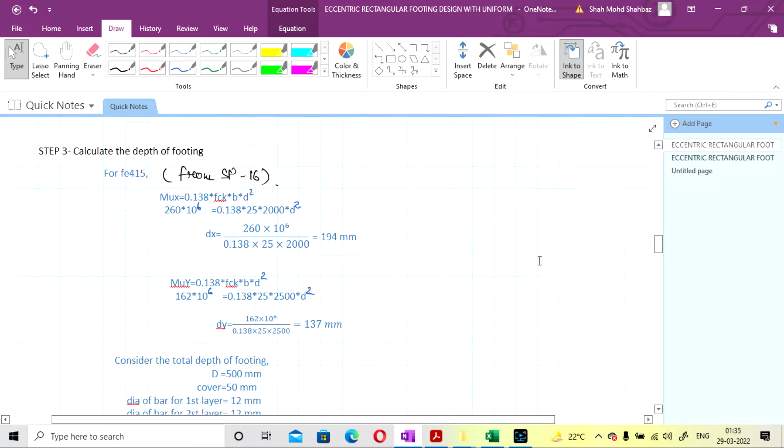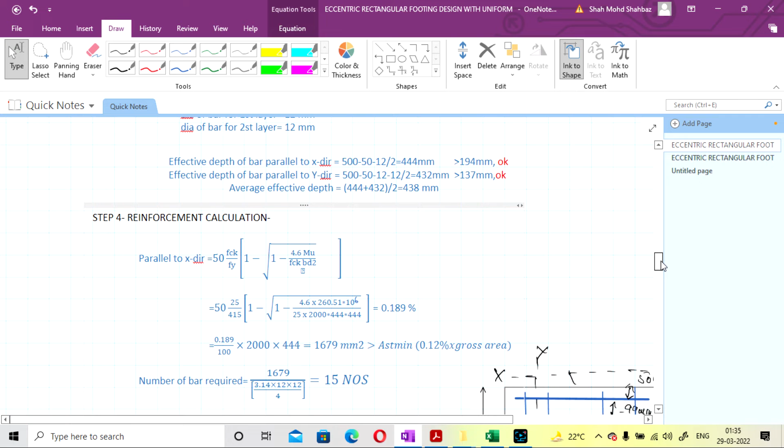This is the second lecture on eccentric footing design for rectangular columns, for uniaxial moment. We have already done the reinforcement design for x and y in both directions. Now we have to go for the check for one way and two way shear.

So here for x direction, how it is calculated. We are going to check for one way shear first. Our critical distance will be at a distance of small d from the face of the column. The small d will be your effective depth in x, and for y direction we will first calculate for x direction.

So we also have to find the net upward pressure at the critical face, that is at distance d from the face of the column.

Now by interpolation you can find this. How to use the interpolation we have already done in our first lecture, you can go and check from there. The same steps have to be followed for the interpolation here also.

So our net upward pressure will be calculated at the critical face. For x direction it is coming as 147.96. The same procedure will be followed as earlier, you can go and check from there.

Now this distance will be 1.909, and this will be 0.591. This will be your effective depth in x direction.

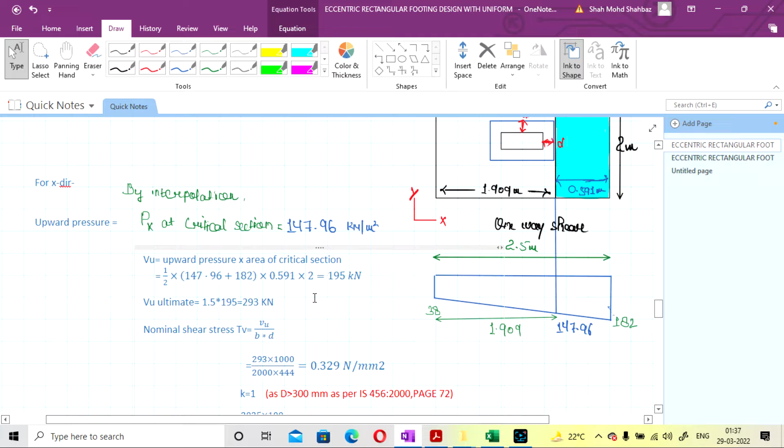So our nominal shear stress will be calculated as tau v equal to VU upon b into d. VU here is calculated as 293 multiplied by 1000 for conversion into Newton per mm square, divided by b, that is the width of the footing, here it is 2 meter, that is 2000 mm, multiplied by d, that is the effective depth in x direction, so it is 444. Our nominal shear stress will come as 0.329 Newton per mm square.

One more thing, we have to consider the K value also. Here it is 1, as our total depth is greater than 300 mm. We have considered our total depth as 500 mm, so we have to take the value of K as 1. This is mentioned in IS code 456 2000 on page number 72, you can go and check from there.

So our percentage of steel will be equal to the steel we have given in x direction, that is 2035 multiplied by 100, divided by 2000, that is the width of the footing, multiplied by effective depth of the footing. It will come as 0.229 percentage, and our tau c, the design shear strength, will come as 0.345.

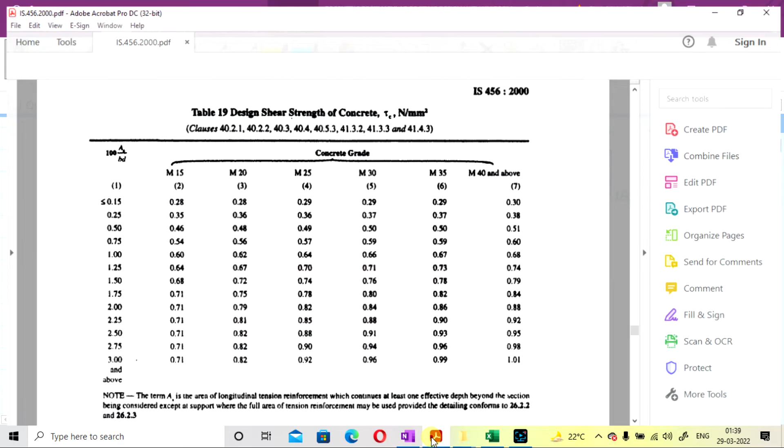How is it calculated? It is taken from IS code 456 table number 19. We have also done the interpolation here. This will be your percentage of steel, calculated as 100 into As upon B into D.

So our percentage of steel comes as 0.229, which falls between 0.15 and 0.25. So we have to write the values 0.15, 0.229, and 0.25, and the grade is M25.

So for the grade we have to write 0.29, find the x value, and 0.36. By using the same interpolation method, you have to find the value, and after interpolation our value comes as 0.345.

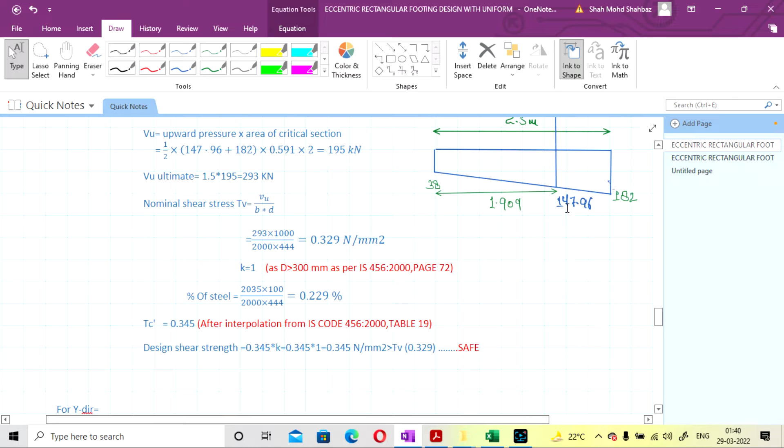So how we have done the interpolation for the upward pressure, we have to follow the same procedure for this also, using table number 19 from IS code 456.

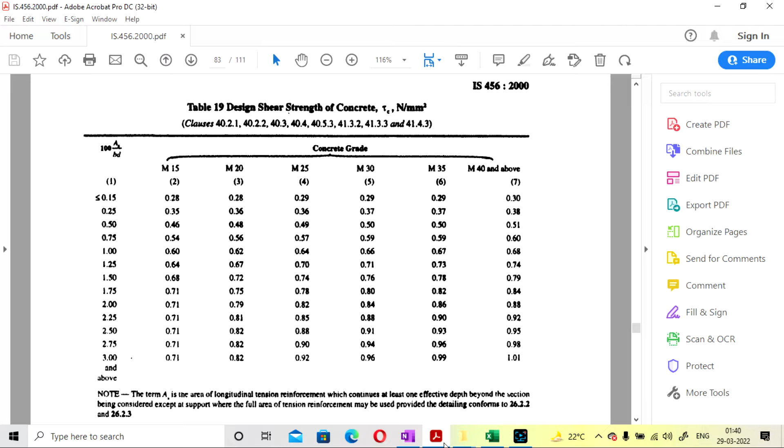If you don't know how to calculate this, I have already shown in my previous lecture for the slab design also, and for the square footing design you can go and check from there, or you can also use the Excel sheet for the design. It also mentions the interpolation table, you can directly fill the values and take the value from there.

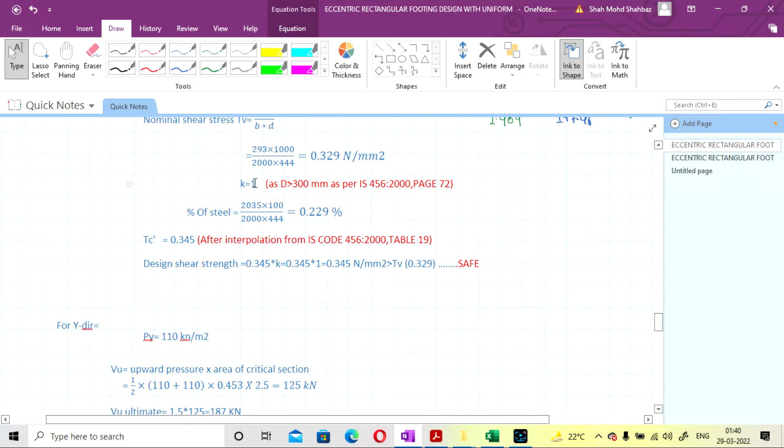Now our design shear strength will be equal to 0.345 multiplied by your K value, that is 1. So it will come as 0.345 Newton per mm square, and this value is greater than our nominal shear stress, that is 0.329. So here it is also safe in one way.

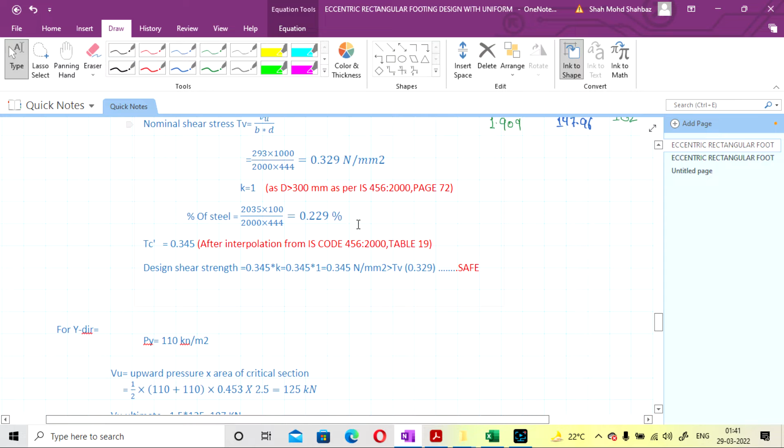So similarly for the y direction, if you want to find, you can also find. So our Py will be, that is net upward pressure in y direction, is equal to 110 kN per meter square, because no moment is applied and your upward pressure is same in all the positions.

So the formula will be similar: net upward pressure multiplied by area of the critical section. So our net upward pressure for both positions, x and y, will be equal to 110 only. So 110 plus 110 divided by 2 multiplied by 0.453. What is 0.453? This will be your critical distance in y direction, multiplied by 2.5.

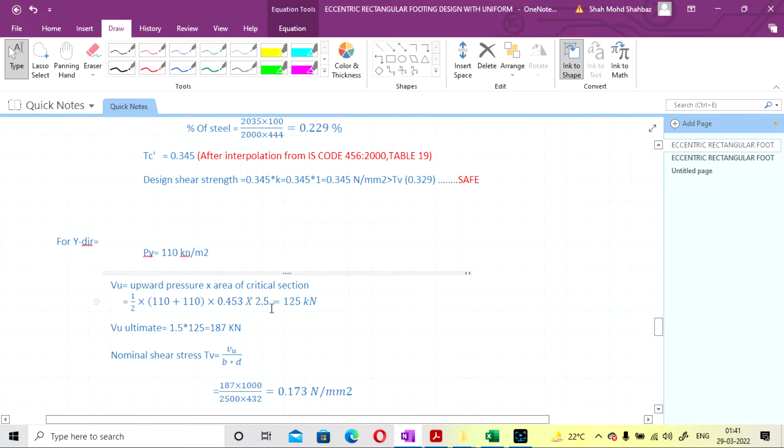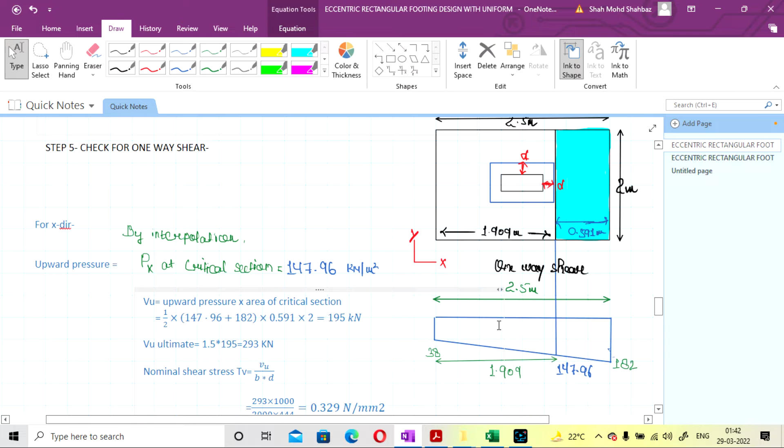So this is how we have calculated for x. Similarly you have to calculate for the y direction. So this will be your y direction here, and this distance will mark the area. So this distance will be your critical distance, and this will be equal to 0.453. This will be your critical distance, this whole portion.

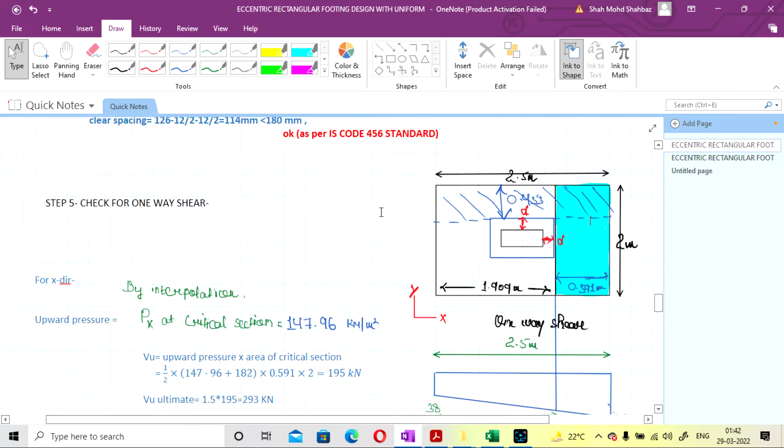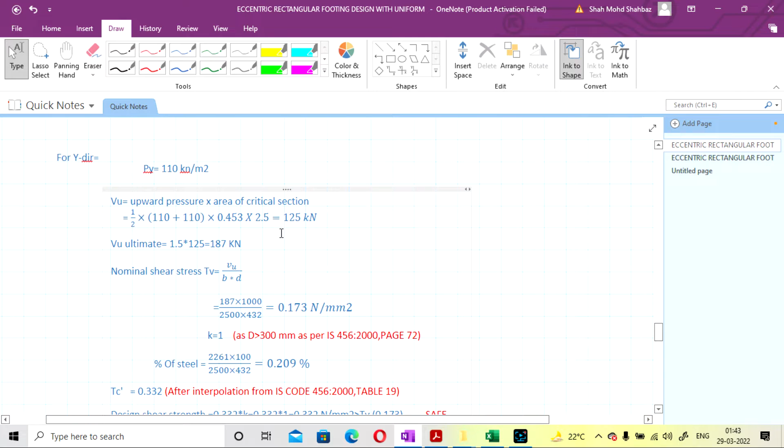For Y direction, so it is equal to 0.453 multiplied by 2.5. This will be your critical area. So here it is, and it will come as 125 kilonewton. Similarly VU ultimate will be 1.5 into 125, that will come as 187 kilonewton.

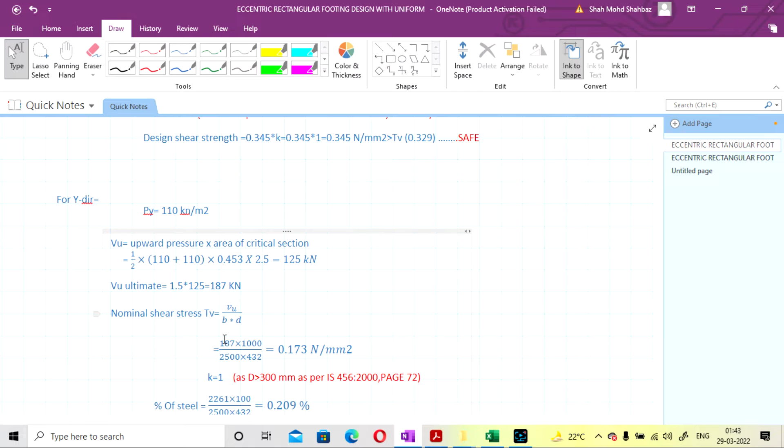So nominal shear for Y will be VU upon BD. VU will be equal to 187 into 1000 divided by 2500 into 432. So B will be 2500 here, that is the width of the footing in Y direction, multiplied with your effective depth in Y direction. So it will come as 0.173.

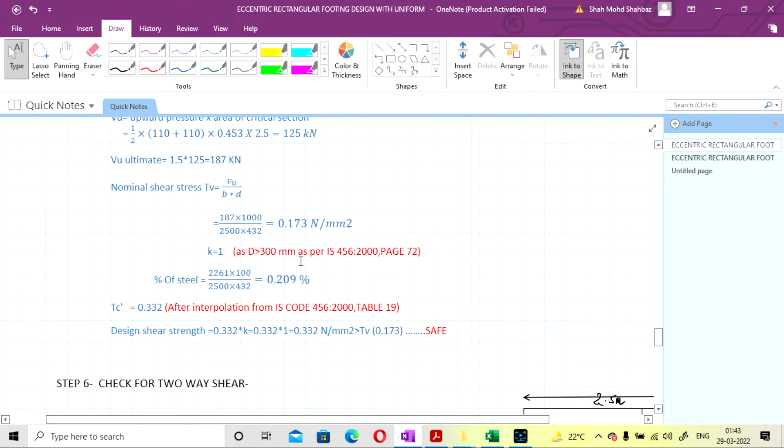K will be taken as 1, as our total depth of the footing is same, that is greater than 300 mm. Percentage steel will become as, what percentage steel we are given in Y direction, that is 2261, multiply by 100 divided by 2500, that is width and the effective depth, so it will come as 0.209.

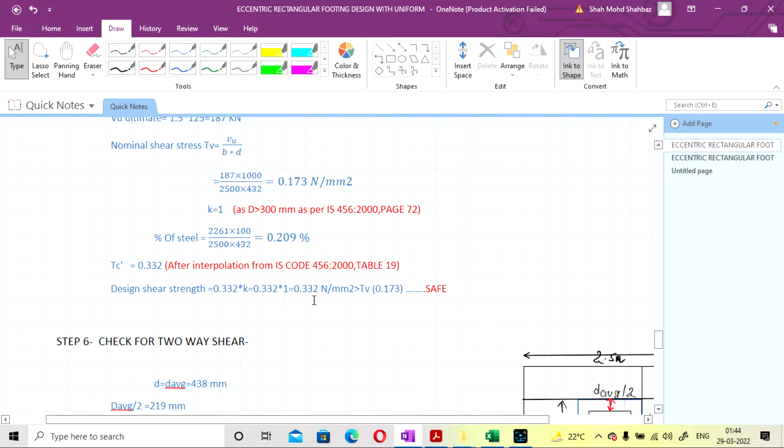And tau c will come by the same interpolation method from table 19, so it will come as 0.332, and our design shear strength will be multiplied by our K value, so it will become as 0.332 Newton per mm square, which is much more greater than our nominal shear strength. So this will be also safe in y direction.

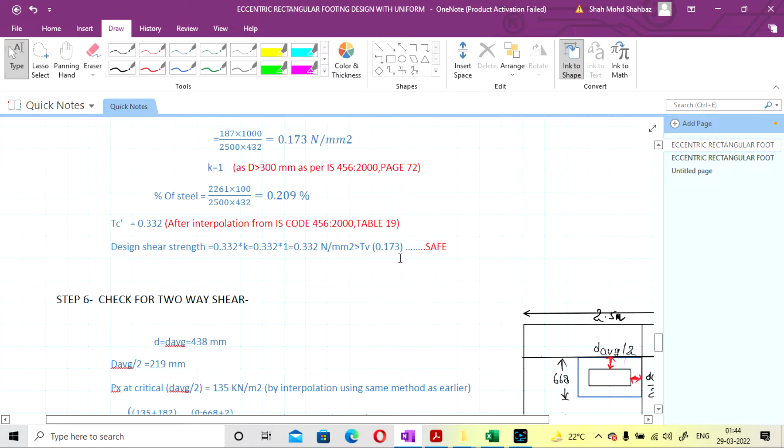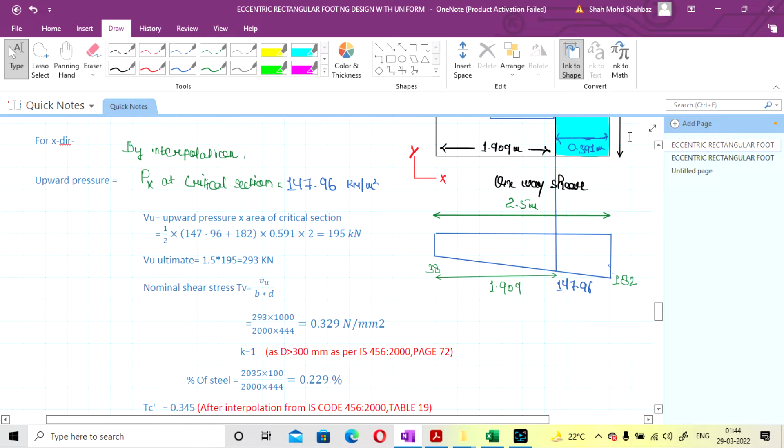So you don't need to find for the y direction if you find for x direction, where the varying moment is applied, as this is more in the longer side, that is x direction. So once you find for the x direction, you don't need to find for the y direction, but how it is calculated I have shown here, you can get it.

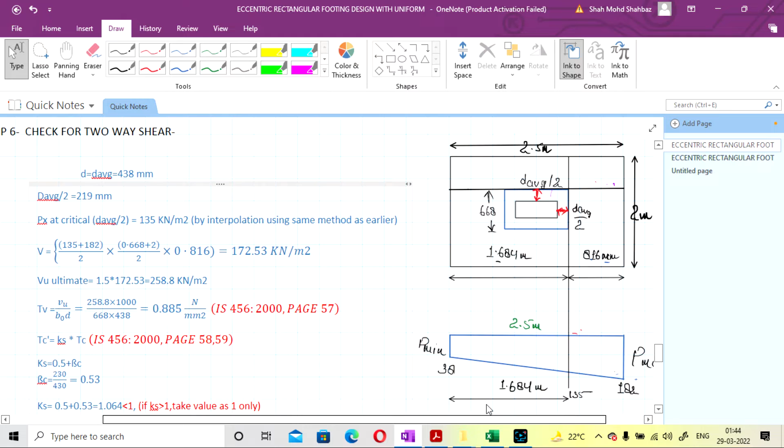Check for two-way shear, that is punching shear, so it will also be called a punching shear check. Why is it called punching shear? Because this check will be applied so that your column will not be punched into the footing and fail. So here what you have to do, you have to consider the average depth in place of effective depth.

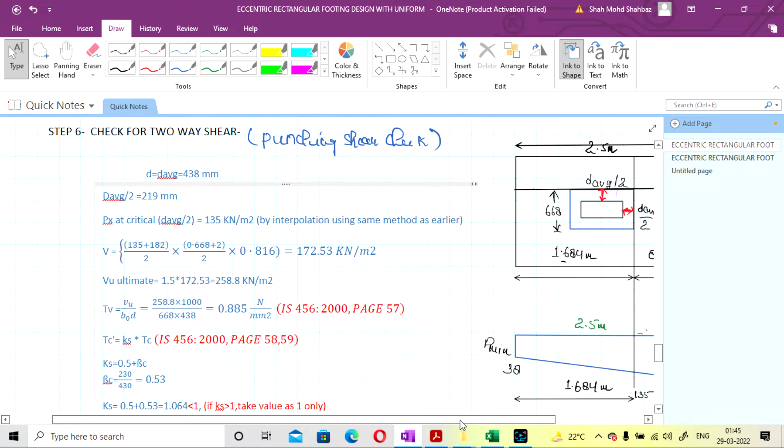Because it will be away at a distance of d by 2 from the face of your column, and here your distance will be different, and here it is taken from all the footing edge surface, so it will be taken from here in this direction, this type.

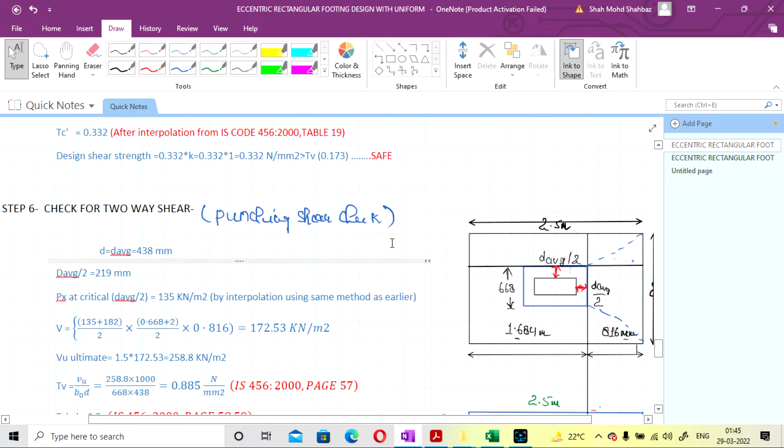So d average will be equal to 438 mm, which we have already done in our first lecture. Sorry, this d is equal to 438, and d average by 2 will be 219 mm, that is this. So our critical section is at a distance of d average by 2 from the face of the column.

So we are considering this area because here our moment will be maximum. That's why we are not considering here, because our ultimate net upward pressure is less than here, so we are considering this value from this side, because here it is more than this side. As we have shown in the diagram, net upward pressure will be more here, so we are going to consider this area only.

So px, that is net upward pressure at critical section in x direction, will be equal to 135 kilonewton per meter square. By using the same method of interpolation, we have to give the value, so it will come at a distance of 1.684 from this corner face of the footing.

So how is it calculated? You have to first find the total distance, and after that you have to minus this value, that is 430 minus d by 2 minus d by 2. Or you can add 430 plus d by 2 plus d by 2 and subtract it from your distance from here. So it will come as 1.684.

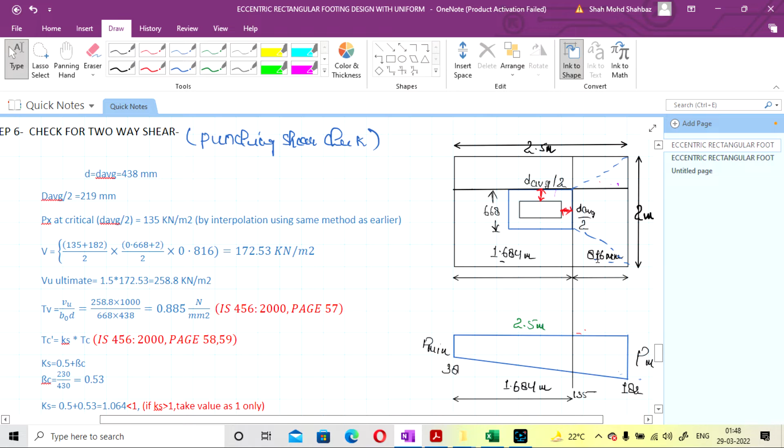This column face total distance 0.668 plus total width of the footing, that is 2 meter, divided by 2. So this average area will come, multiplied by 0.816. So it will come as 172.53 kilonewton per meter square, and VU ultimate will be multiplied by 1.5, so it is 258.8 kilonewton per meter square.

Now tau v, this formula will be a little bit different from one way shear, so it is equal to VU upon B naught into d, and here your B naught will be this 668. You don't have to take the footing area because we are going to check for punching, so here we have to take the value from the column area only.

So it is 668, that is the total shorter side of the column, plus effective depth d average by 2 plus d average by 2. That will come as 668 multiplied by 438, that is d average, the average depth of the footing. So it will come as 0.885 Newton per mm square, and it is mentioned on page number 57 of IS code 456 2000.

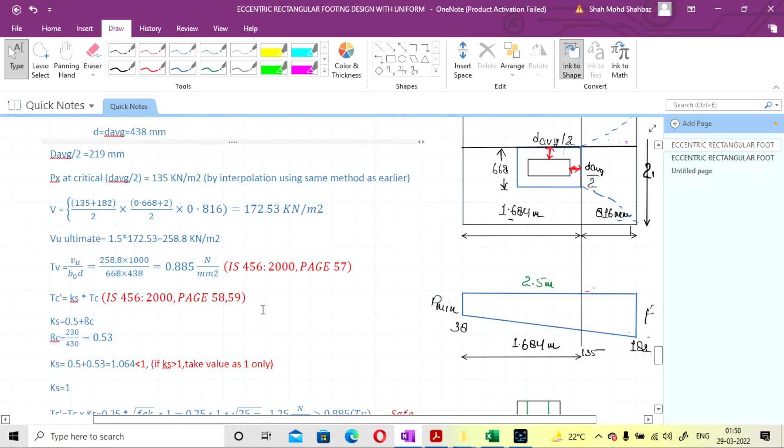Now tau c dash will be equal to Ks into tau c, so this will be the design shear strength. Ks into tau c is mentioned in IS code 456 page 58 and 59.

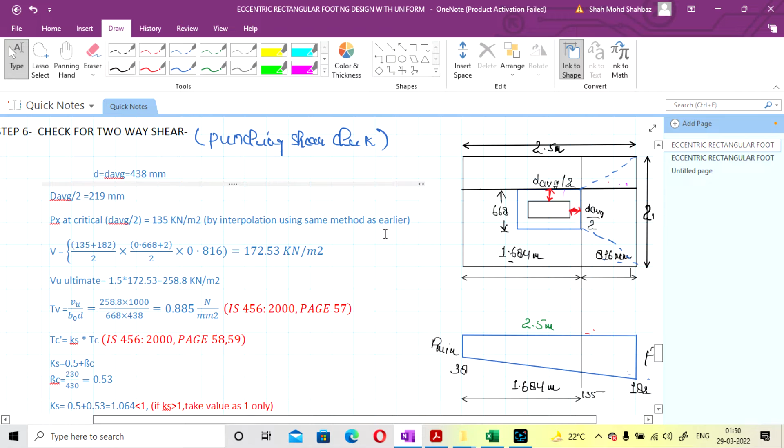Ks value will be equal to 0.5 plus beta c, and beta c is equal to the ratio of shorter side to longer side of the column, that is 230 by 430, and it will come as 0.53.

So Ks will be equal to 0.5 plus 0.53, and it will come as 1.064 -- but you don't have to consider the value more than 1. So if the value comes more than 1, you have to take the value of Ks as 1 only. If the value of Ks comes less than 1, you take that value, but if it comes more than 1, you take the value as 1 only. So Ks we are considering here as 1 only.

Now our tau c dash will be equal to tau c into Ks. Tau c is equal to 0.25 multiplied by square root of fck into Ks, that is 1. So 0.25 multiplied by fck is 25, square root of 25, so it will come as 1.25 Newton per mm square, which is greater than our tau v of 0.885 nominal shear, so this will also be safe in punching shear.

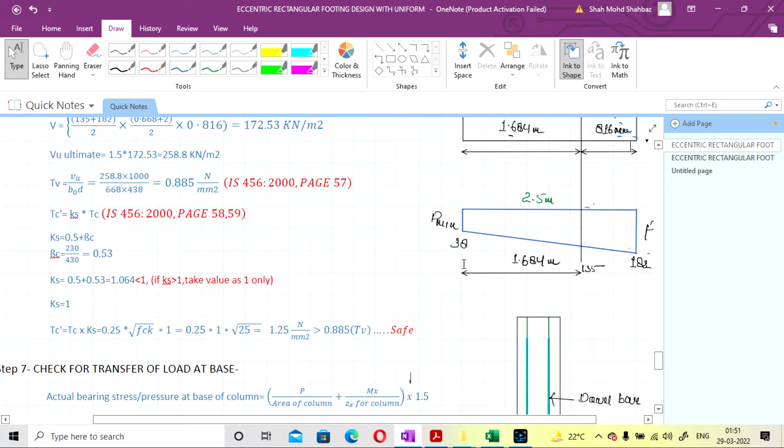So here it is maximum at the critical section, so you don't have to find for y direction. This will be a longer side, and here your maximum p ultimate pressure is coming, so this will be safe for two-way shear only.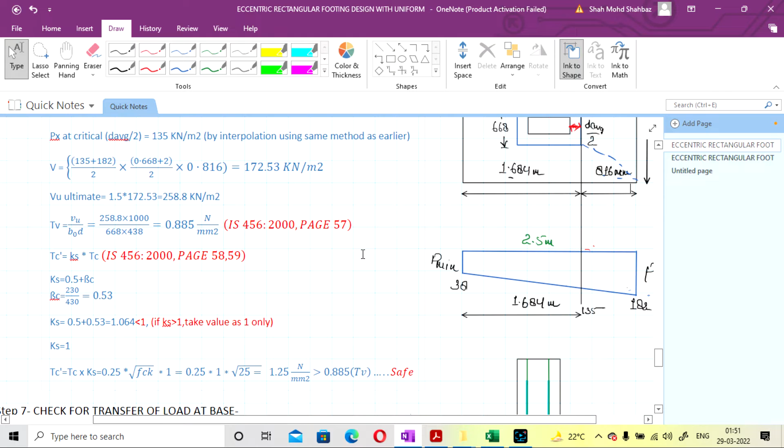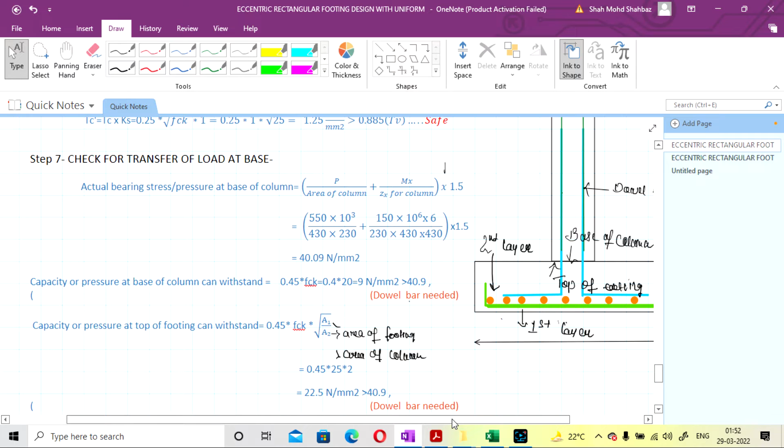Now we have to check for the transfer of load at the base of the footing. This will be the formula for uniaxial moment, for the calculation of force at the base for uniaxial moment footing: actual bearing pressure at the base of the column will be equal to P, that is the service axial load on the footing, divided by area of the column, that is 550 into 10 to the power 3 divided by 430 by 230, plus moment in x direction.

So either in uniaxial moment, either your mx value will be provided or your my will be provided, you have to mention that. Here our mx moment is given, so we have taken for mx only. If it is given for my also, you have to consider this value for my divided by zy for column, that is section modulus for column. In the Excel sheet I have given for both mx and my, so you have to directly fill the value only if moment is given for x direction, that is major moment, or if moment is given for y direction, that is minor moment, so you can directly calculate without any problem.

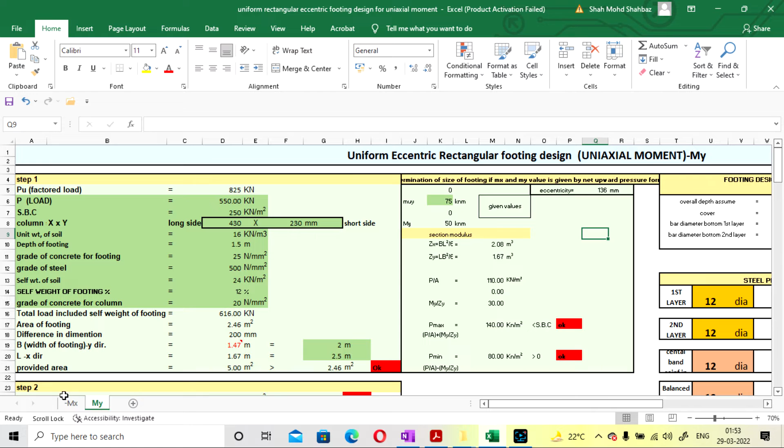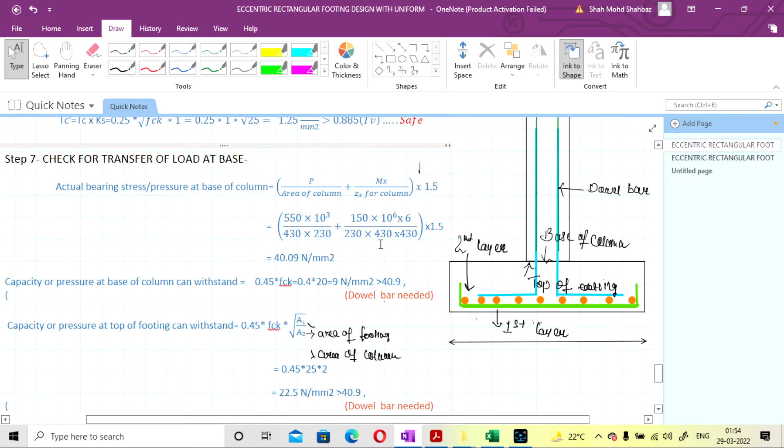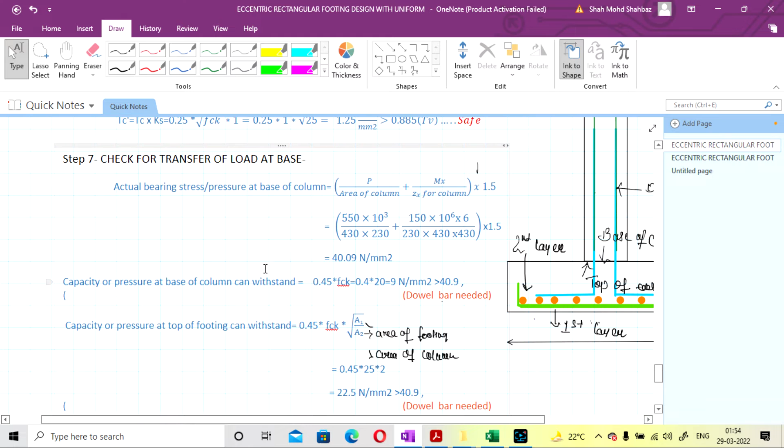So now it is equal to plus mx by zx for column multiplied by 1.5. It will come as 550 into 10 to the 3 divided by 430 by 230 plus mx, that moment in x direction is 150 into 10 to the power 6 divided by zx, so it is b d square by 6. What is b? You have to take the value from column only, it is 230 multiplied by d, that is the depth of the column. So d square it is 430 into 430 into 1.5. Why have we taken 1.5? Because we are taking the ultimate values. So our value will come as 40.09 Newton per mm square. This will be the actual pressure coming at the base of the column.

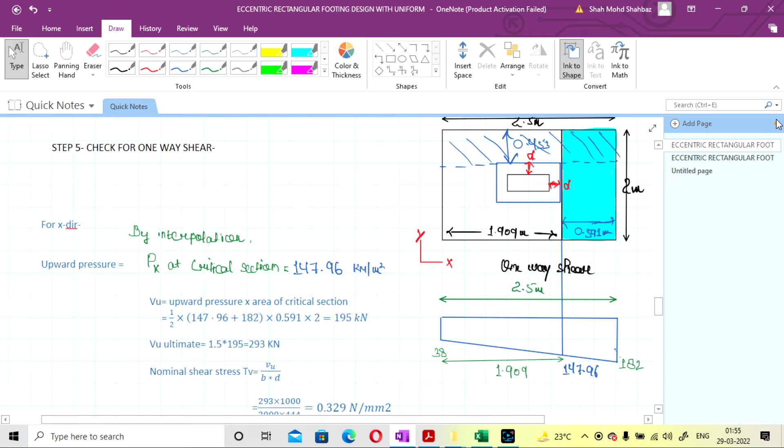Now we have to check either our column base or footing top will be able to take the pressure or not. So capacity or pressure at the base of the column which it can withstand will be equal to 0.45 multiply fck. Here you have to consider the grade that we have given for the column only, that's why we have taken the grade of concrete for the column at the starting, that is M20. So here you have to take that value only. So it is 0.45 into fck, that is 0.45 into 20, it is coming as 9 Newton per mm square, which is less than our calculated actual pressure. So here you have to provide a dowel bar at this position, because our column is going to take the load up to 9 Newton per mm only.

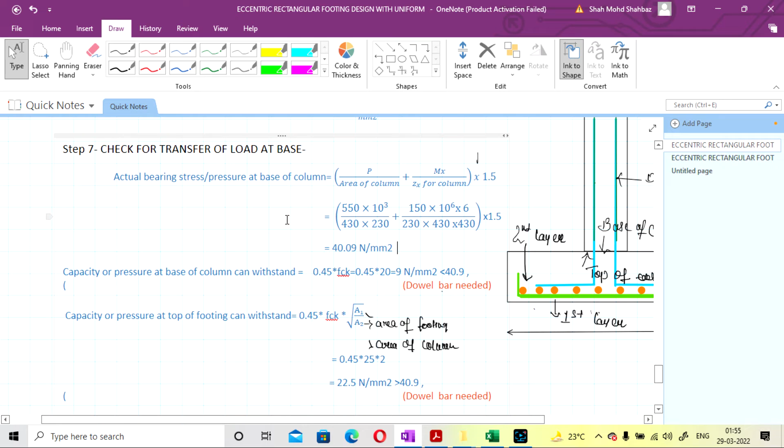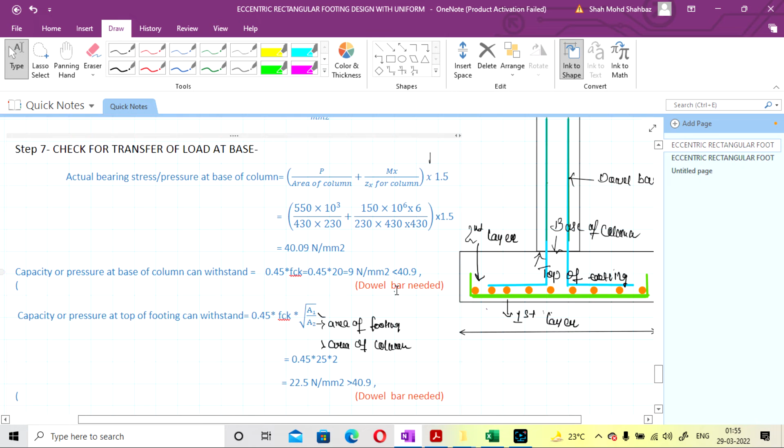And here our actual load is coming as 40.09 at the base of the column. This will be our base of the column, so you have to provide a dowel bar here. Similarly, you can check for the footing top also. The position for both the base of the column and top will be same, but we have to check for both the values.

So capacity of pressure at the top of the footing which can withstand the pressure will be equal to, this is the formula, 0.45 into fck into A1 by A2, and A1 by A2 will be your area of the footing upon area of the column, or area of the cross section, whichever is greater you have to take that value, and it is generally taken as 2 only. In most of the cases this value A1 by A2 is 2, but if you don't know how to find this A1 by A2, you can just check my previous lecture for square footing, you can get the answer. So it is equal to 0.45 into fck multiplied by square root of A1 by A2, and it is 0.45 multiplied by 25, this will be the grade of your footing, multiply by 2, that is square root of A1 by A2 value will be 2.

So our footing load that it can bear will come as 22.5 Newton, but it is also less than our actual pressure, that is 40.9. So you have to provide a dowel bar according to this also, so you have to give the dowel bar here.

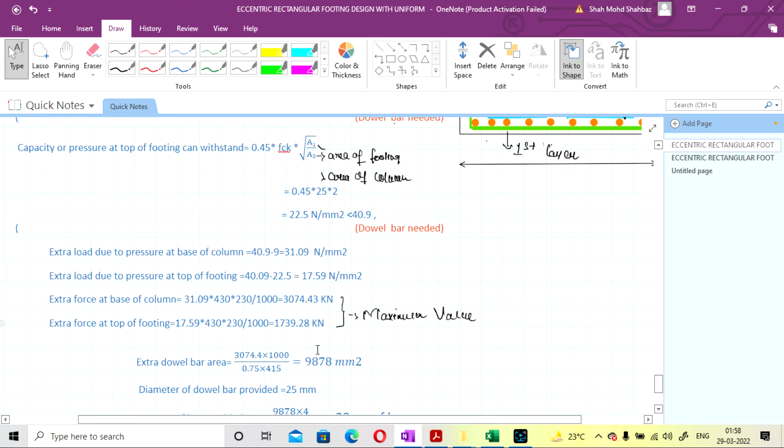So to take the maximum of this value, the extra dowel bar area will be equal to the 3074 force multiplied with 1000 divided by 0.75 into Fy. So this will be the formula for the calculation of dowel bar, and it is given in IS code 456 only. You can check from there also.

So now we have calculated the extra dowel bar area is equal to 9878, that is 3074 multiplied by 1000 divided by 0.75 Fy. The diameter of bar will be equal to, we are considering for the dowel bar, 25 mm. The number of bars will be calculated as 9878 divided by pi d square by 4, that is 3.14 into 25 into 25 by 4. So it will come as 20 number of bars.

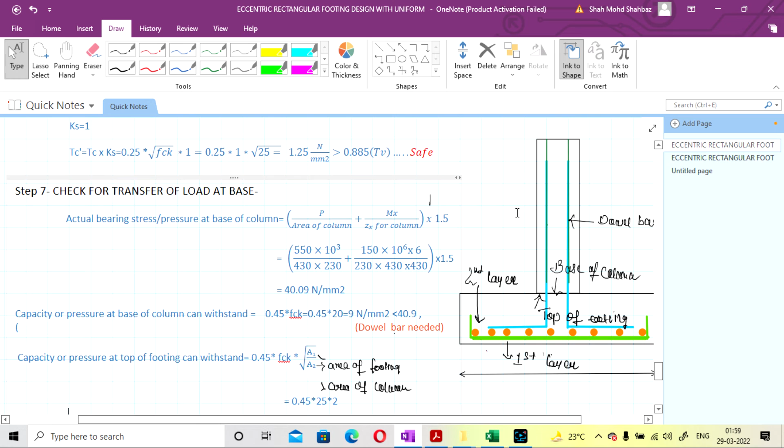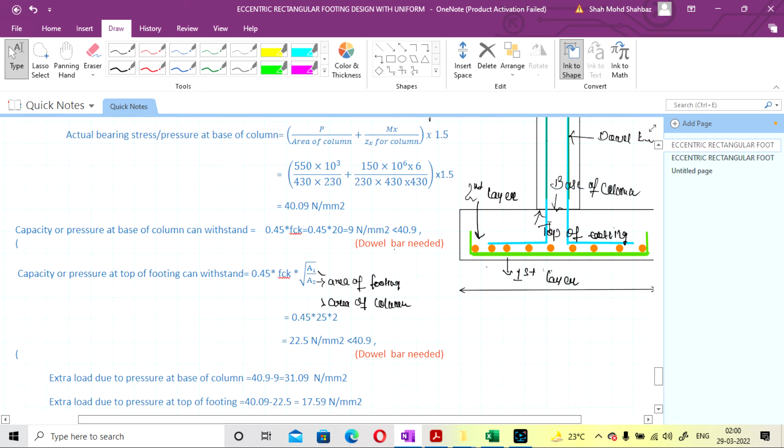Now we have to also find the final weight of the footing that we have got. So it will be the area of the footing multiplied by, sorry, this will not be a load, this is the total depth of the footing.

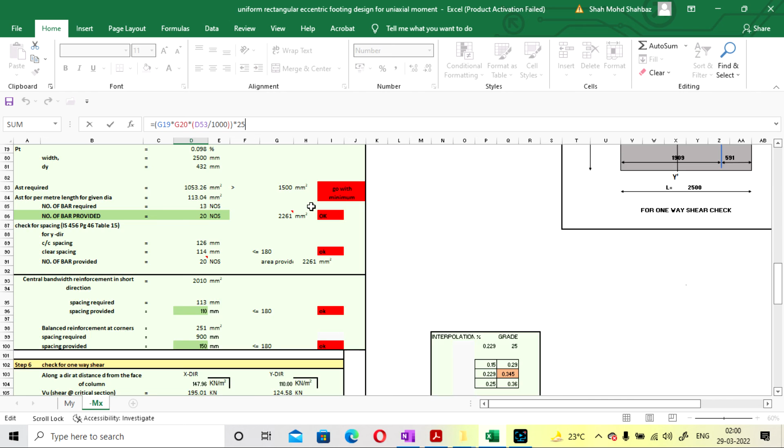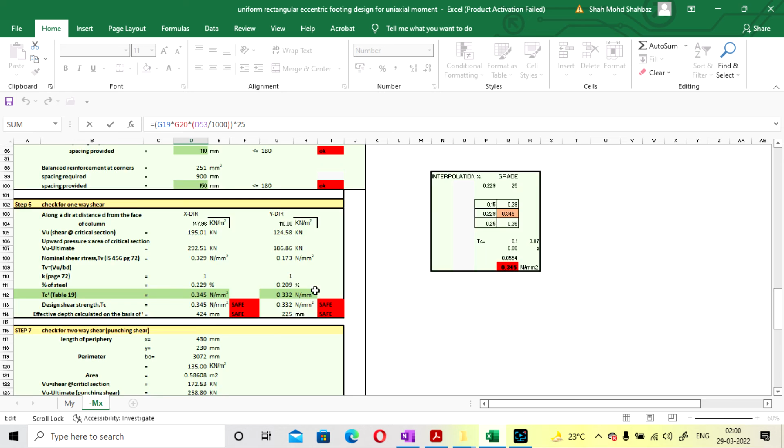One minute, let me just check whether I have done anything wrong here. Okay, it was right here, no problem. And here it is safe.

So this will be the area of the footing total into density of the concrete that we have taken. So it is 2 into 2.5 area multiplied by the total depth of the footing multiplied by density of concrete. So it will be equal to 62.5 kilonewton.

So this will be the final weight of the footing, and at the starting we had considered 12% of the load coming from the column. So our 12% will be 12 by 100 into 550, which is equal to 66 kilonewton. We have considered the larger value than the final weight we got here, so this will be safe. If this value is less, you have to again increase the initial percentage of footing self weight.

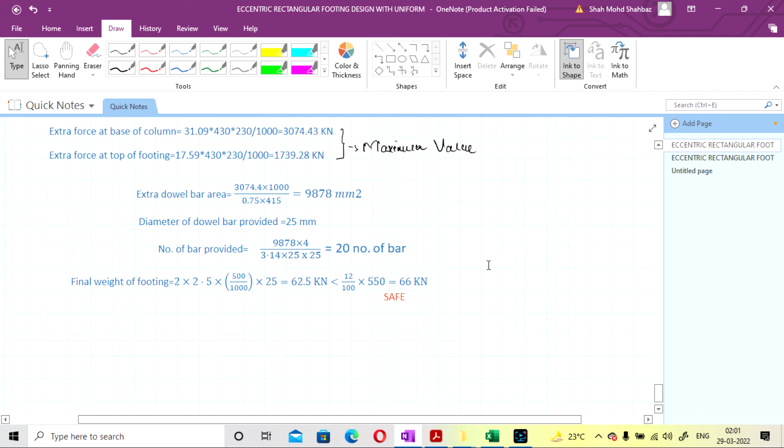That's why I'm not taking 10% of the self weight, I considered 12%, because I know that if we consider 10% here, I'll show you in the Excel sheet. See here, if I set the self weight of footing as 10%, at the end if you see the final weight of the footing, it increases, so again we have to increase the self weight of the footing. That's why we took the percentage of self weight of footing as 12%.

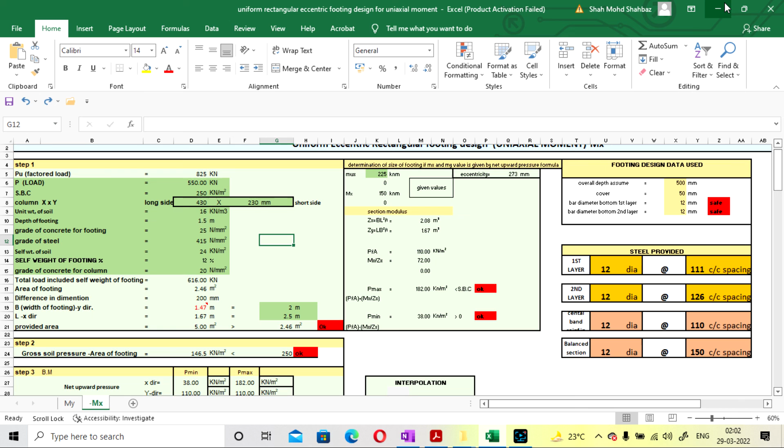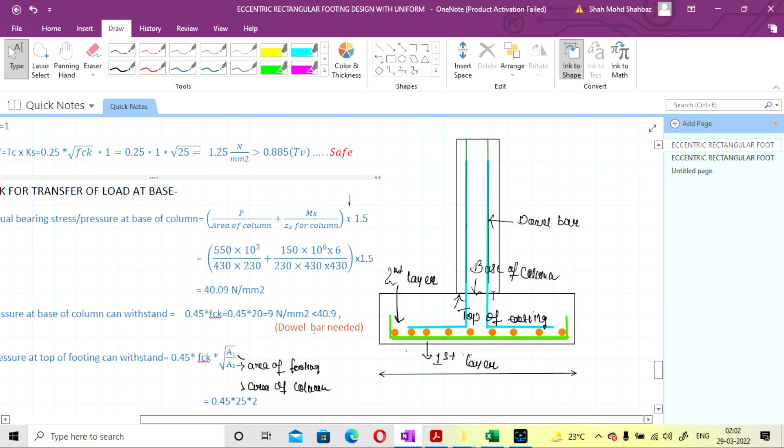So here this will also be safe, and we have completed our design of uniaxial eccentric footing for a rectangular column. This will be the bar position, how it will be laid: this green portion shows the first layer of bar, this orange one is the second layer of bar, and this blue one is your dowel bar, that is 20 number of bars, and it will bend like this.

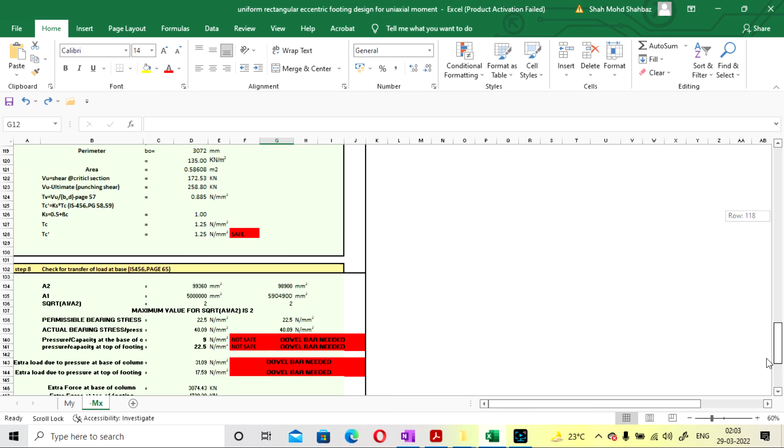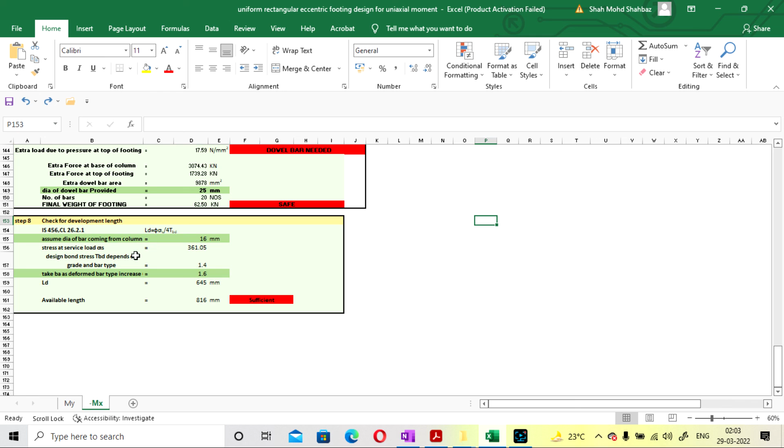And we have also done the calculation for the development length, and we have already done a separate video for the development length calculation. You can check from there, I will provide the link at the end of the video. We have already given in the Excel sheet how you can calculate the development length according to your HYSD bar or mild steel bar. I'll provide the link of the Excel sheet in the description, you can download from there.